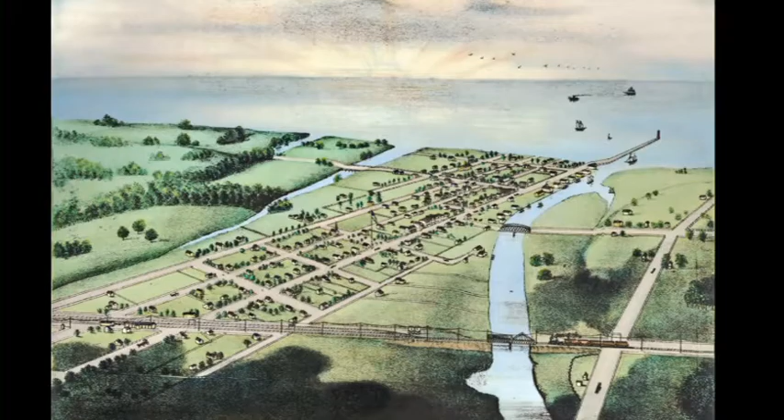After the War of 1812, more and more settlers arrived from the east, eager to carve out new lives in the wild lands of Ohio. The Huron River's easily accessible harbor made Huron a natural Great Lakes port, but first the town had to make some improvements to its harbor. The biggest problems were the sandbar that often formed across the mouth of the river, preventing boats from entering, and the shallowness of the river itself.

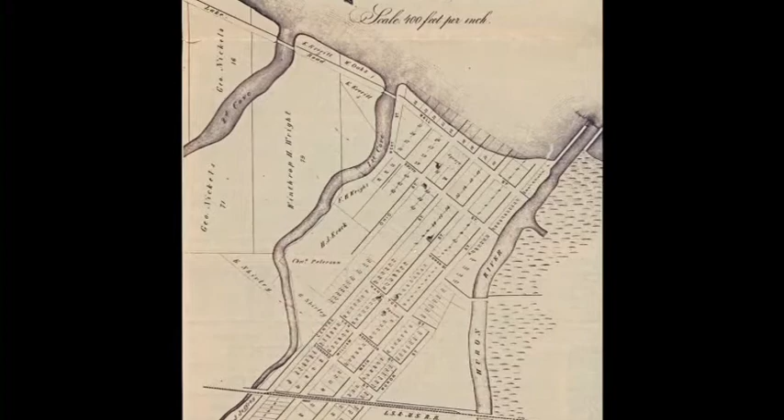In 1823, a group of Huron and Milan merchants formed the Huron Harbor Committee. In 1824, the village was platted, and soon after, a portion of the town was auctioned off to finance improvements to the harbor. In 1827, the federal government stepped in after private funds ran out.

In the mid to late 1800s, railroads were looking for the most ideal locations to build railways and ports. The ore docks in Huron were a typical railroad response in the 1870s and 80s to gain access to the growing iron ore and coal trade on the Great Lakes.

Prior to that time, it had primarily been lumber and other commodities, but now iron ore was starting to assume rather gigantic proportions, so it was a lucrative business because ore used to be mined in Pennsylvania. Now it was coming from Michigan in the 1880s, then later in Minnesota in the 1890s, and it was becoming a very major commodity. So different railroads went to different harbors and built their own facilities.

Almost every town that had a river going into Lake Erie wound up with an ore dock or two. So Huron was the choice of the Wheeling and Lake Erie, which would get iron ore from Minnesota or Michigan, and they would haul it from Huron to southern Ohio, West Virginia, where all the steel mills were.

The railroad closed within 2 years because it could not attract regular traffic or financing for expansion. In 1880, railroad magnate Jay Gould invested in the Wheeling and Lake Erie with the intention of forming a transcontinental railroad system.

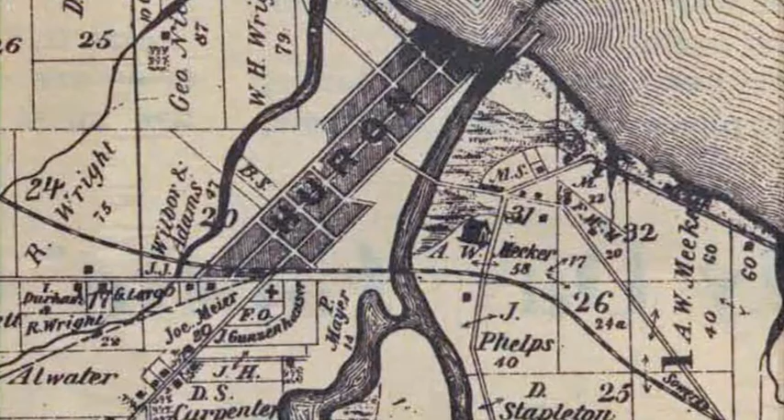Huron then became the Wheeling and Lake Erie's port. Work began on the docks, and what became known as Slip Number 1 was completed in 1882. The dock handled coal, iron ore from mines in Michigan, and lumber that arrived by ship and rail.

The only equipment was the whirlies, small steam-driven cranes that could load or unload a ship. The whirlies ran up and down the east side of the new slip on rails so they could be spotted where needed. A small boiler mounted on a wooden cab worked a hoisting system that raised and lowered a tub. They were called whirlies because after the buckets were filled, they whirled around to be emptied.

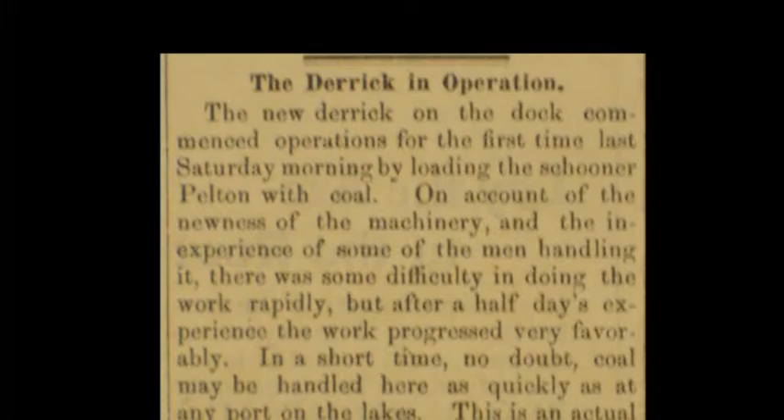The dock workers filled and emptied the buckets by hand. The first ship to be loaded with coal was the sailing schooner Pelton. The first iron ore shipment arrived in Huron in 1883 on the schooner L.C. Butts. It took 16 men to unload 1,120 tons of ore in 3 days, using shovels and the whirlies. Each man was paid $6 for his work.

Around 1888, it became apparent the Huron docks needed to be upgraded if they were to benefit from increased ore and coal traffic. The Wheeling and Lake Erie Railroad finances were poor, so the Huron Dock Company agreed to operate the dock and install new ore and coal unloading equipment.

The first improvement to the docks was the installation of a steam-powered shovel to load coal boats. The shovel was mounted on a pedestal and had a special bucket to scoop the coal out of the railroad car and dump it into the ship's cargo hold. This was an improvement over the whirly buckets, which had to be loaded by hand.

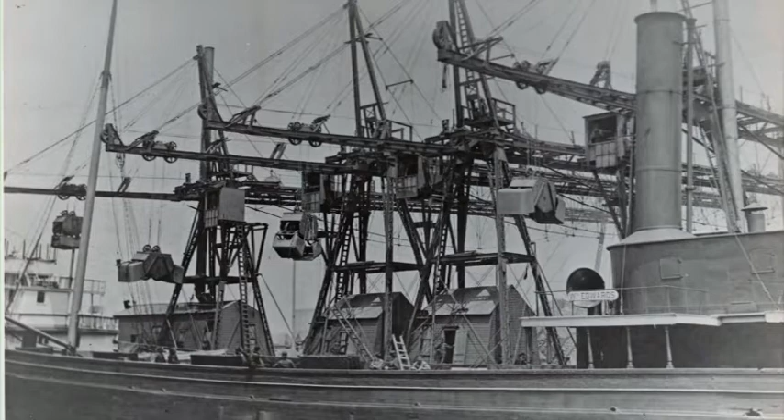The next improvement was the installation in 1894 of 4 McMyler bridge tramways on the north side of the slip for unloading ore boats. The ore bridges had a capacity of 300 tons per hour, compared to 30 tons for a whirly. The McMylers worked by having a bucket carried forward into the apron by cables and dropped into the hold. After it was filled, the buckets were hoisted back onto the bridge and either dumped into cars or onto a storage pile. In the early days, the buckets were filled by hand. The machines were rebuilt to use self-filling buckets in 1906. The bridge tramway revolutionized bulk materials handling, but the whirlies remained in service for many years.

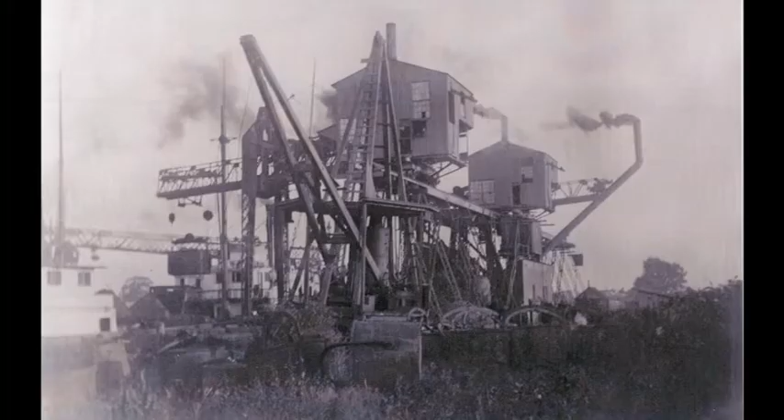In 1896, the coal dock was relocated to the south side of the slip. In addition, the federal government extended the West Pier another 973 feet and built a new East Pier.

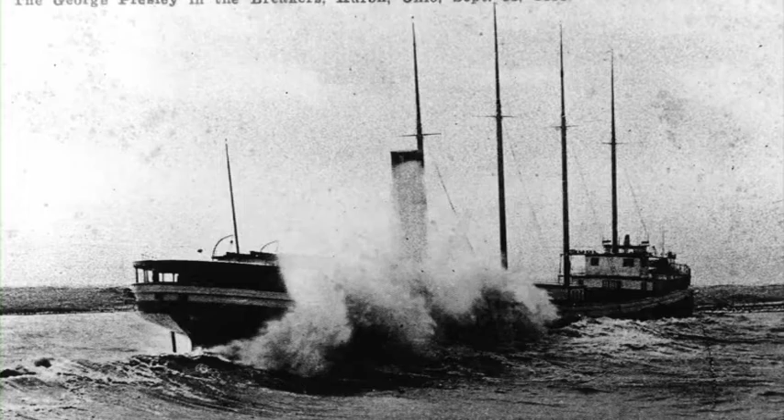In the early 1900s, the lake vessels were getting larger and needed more water and room to turn around when emptied. The ships had to be towed by tugboats out into the lake, and the river wasn't deep enough for the larger boats. They often ran aground, as the George Presley did just off Lakefront Park on the north side of Huron bordering Lake Erie. The bigger ships started shying away from Huron as word of the harbor's problems spread. The docks needed to be updated to stay competitive.

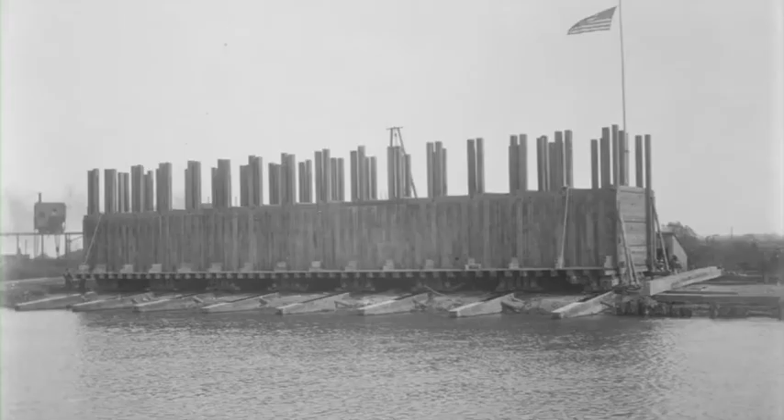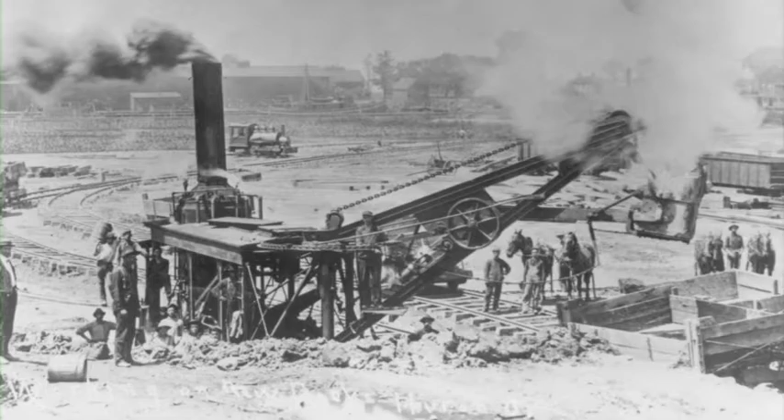In 1906, the Army Corps of Engineers widened the harbor from 120 to 180 feet and extended the west breakwall. And in the same year, the Wheeling and Lake Erie Railroad announced it would spend $1 million on dock improvements, including the construction of a second slip for both ore and coal, the construction of a 1,000 railroad car capacity yard south of the new slip, and the construction of 4 steam-powered ore unloaders called fast plants on slip number 2.

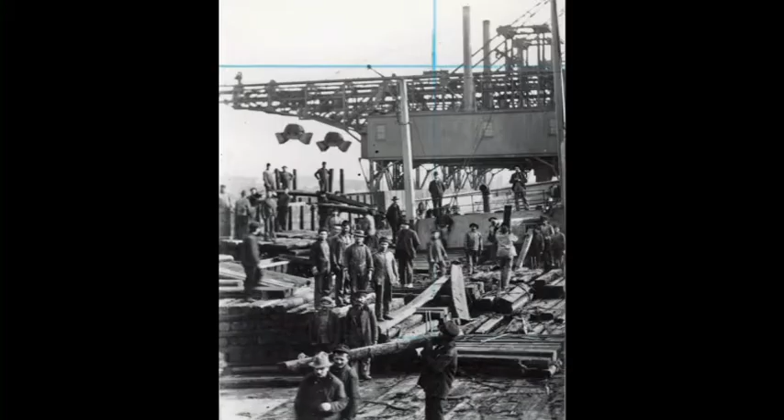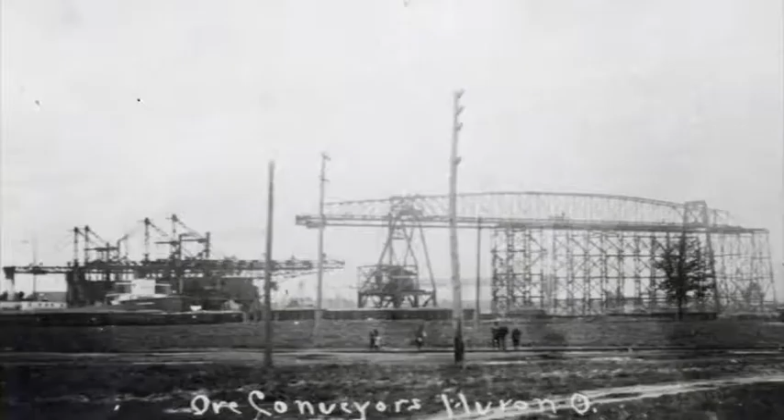They could unload a boat's cargo directly into railroad cars. The installation of a steam-powered traveling ore bridge behind the fast plants to pick up ore for loading into the railroad cars and for transportation to the new storage yard, which was built between the 2 slips. It could store 600,000 tons of ore. There was also construction of a new McMyler car dumper and coal dock complex opposite the fast plants.

The fast plants worked similar to the McMylers. They could unload a boat directly into railroad cars, but not onto the storage piles. They did not extend over the storage yards, but rather dumped ore behind the machines so it could be picked up by a traveling ore bridge.

A new slip and turning basin was built on 200 acres of marshland upriver from slip number 1. This meant that Berlin Road, the main east-west road in Huron, had to be moved. The crossing was located on the south end of the Wheeling yards and was blocking the expansion of the turning basin and shipping channel. A new bridge was built over the river in 1914.

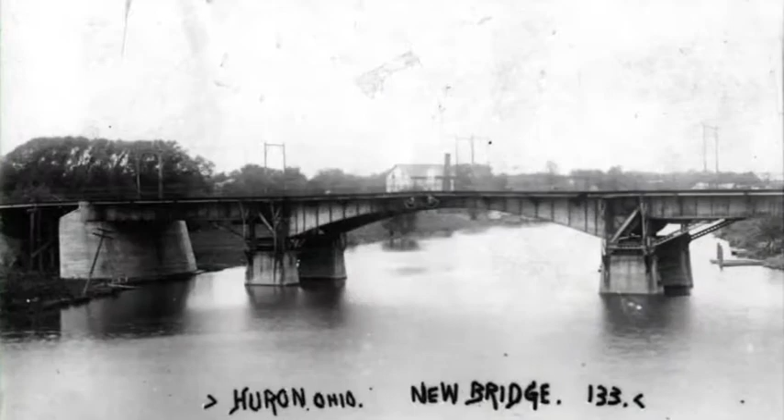The first men to work on the docks were Hungarian immigrants who came to the United States in the 1880s and 1890s to escape political turmoil and high taxes in Hungary. They were soon followed by the Italians in the 1890s and early 1900s, who came to America because of disease, starvation, and economic crisis in Italy.

There was a manpower shortage. Huron was probably less than 2,000 people at that time, and so they had to get somebody to work on these docks. It was hard work. A lot of the people here were farmers, or businessmen with stores. So somehow, and I'm not exactly sure about this, but somehow, either through word of mouth, people from Italy and Hungary that already had friends here heard about it, and they ventured over.

And there were 3 areas from Italy. One of them was Alvito, and that's where most of them were from, and that's where my father was from. There's another town called Creci, close to there, and that's where the Miolas and the Caterys and Jabels came from. And there was Calabria, and the families that came from Calabria were the Laritzes, Joffreys, and Pissanos. And so anyway, these people came here.

They rustled up enough money, got a ride to Naples and came across on a boat, through Ellis Island, got on a train and ended up here. And they had friends that were already here, so they were able to stay at the boarding house there. And they showed up one day on the dock, gave their name, and started working.

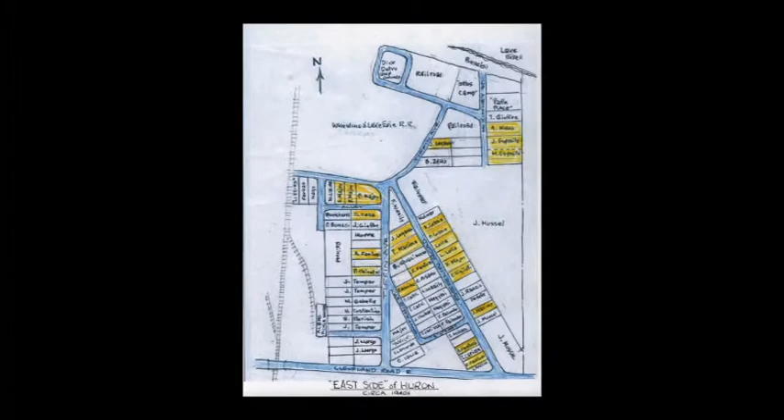It was an area where there were a few houses, and I think the company, the Cleveland Stevedore, anticipated bringing in outside workers, and I think they built some homes there. There's about 4 or 5 of them that still exist that were used as boarding houses. It was available, close to the dock, adjacent to the dock, and there were some houses there that could put up some of the people. It stayed like a close-knit area.

Growing up, there were a lot of kids. One of the things I really enjoyed about that period was there were so many kids my own age. We had the lake on the north, we had the fields in the east that separated us from the dock, so that was all available to us for doing anything we wanted. With so many kids, we always had enough close to the same age to have football teams and baseball, and it was a great place to be growing up.

One of the things was, though, that Italians - even today, everybody has a garden. Back then, because of the Depression, they had not only gardens but they raised chickens and had a couple of cows. It was that rustic - that area at that time, they could do it because of the big fields to the north and west of the area. Old Homestead was practically nothing there at the time.

And so it was kind of like a little colony, and the locals, people had to walk to town. There weren't many cars at that time, so they'd get the groceries they needed to feed their families. The thing about Huron at that time, it boggles my mind: it was less than 2,000 people, yet there were 3 grocery stores, 3 auto dealers, several restaurants, at least 3, 2 hardware stores, two drugstores. It went on. Now you look there and there's a boat basin. Everything they needed was within walking distance, and they became friends with the local dealers, like the Thomas Market, and began to fit in. But still, there was that little prejudice with some of the people.

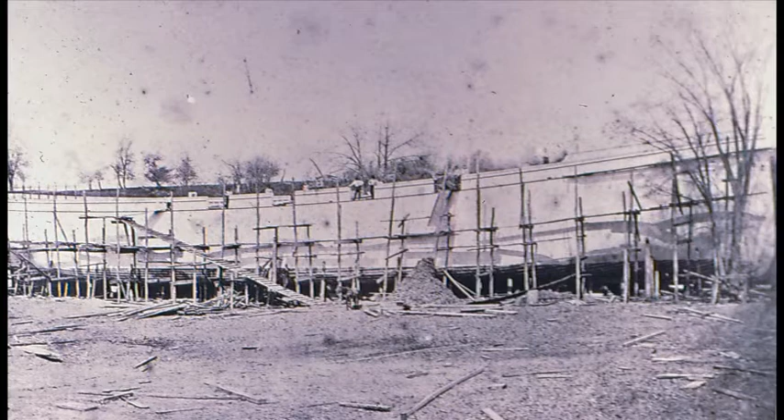One of the largest schooners to sail the Great Lakes was built just a few miles up the Huron River at Fries Landing by Valentine Fries. At 287 feet long, with a carrying capacity of 3,100 gross tons, the Golden Age was a huge oak-hulled, four-masted schooner completed in 1883.

She sailed the Great Lakes for 41 years, the last of which as the barge Pringle out of Detroit. She was sunk as part of a breakwater near Put-in Bay, Ohio, in 1924.

Another schooner built by Valentine Fries was the Charles C. Foster. She was one of about 40 vessels chartered in 1898 by the Atlantic Transportation Company of New York to engage in the coal trade on the Atlantic coast between Norfolk, Virginia, and New England ports. The boats were no longer needed when the coal market collapsed after the end of the Spanish-American War in 1899.

Some of the fleet returned to the Great Lakes, including the Charles C. Foster. Her life as a Great Lakes cargo boat lasted just 6 months, from June to December of 1900. She was being towed by the steamer Iron Duke with a cargo of iron ore when she sank in a storm off Presque Isle near Erie, Pennsylvania. Eight lives were lost when she sank. A month later, the Foster was found 80 to 100 feet under Lake Erie.

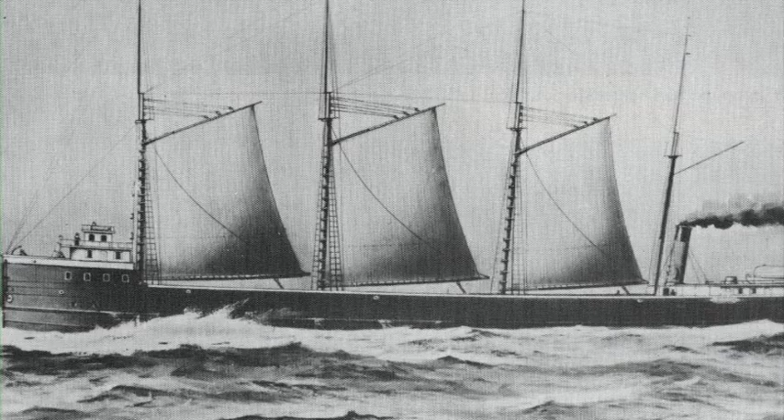In 1884, the Chauncey Hurlbut, a wooden steam barge built in 1873, brought the second load of ore cargo to the Huron docks. Dock workers unloaded 1,195 tons of iron ore and then reloaded her with coal.

The 185-foot-long steam-powered bulk freighter was constructed of wood. The pilot house was located forward, with the engine room aft and the cargo hold in between. The Chauncey Hurlbut sailed the waters of the Great Lakes for 30 years before she was lost in a storm off Vermilion in 1908. Iron was good.

They built a few of those boats, but then they found out iron was brittle.

So they went to steel, and that became the standard. It was still the steam barge concept, but they started calling them boats again. And they grew in size. By 1900, they were 400 feet. By 1905, maybe 500 feet. By 1910, 600 feet. But they were all the same standard design with a pilot house forward, a large open cargo hold, and the propulsion equipment in the stern. And things didn't change for a long time. It wasn't until the 1970s that the self-unloaders came in.

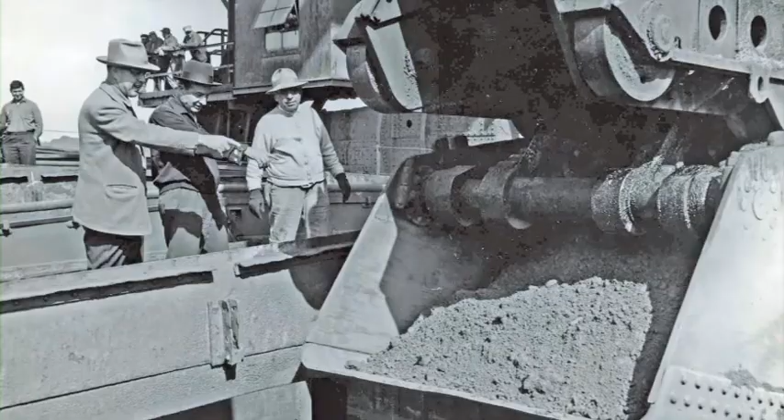The Huletts consisted of a large walking beam mounted on a carriage that moved laterally across the docks. It was mounted on a huge traveling base that moved up and down the docks on rail and could be positioned over any hatch on a boat. A self-loading clamshell bucket was attached to the base of a vertical leg fastened to the outboard end of the walking beam. The operator rode in the leg and controlled the movement of the machine.

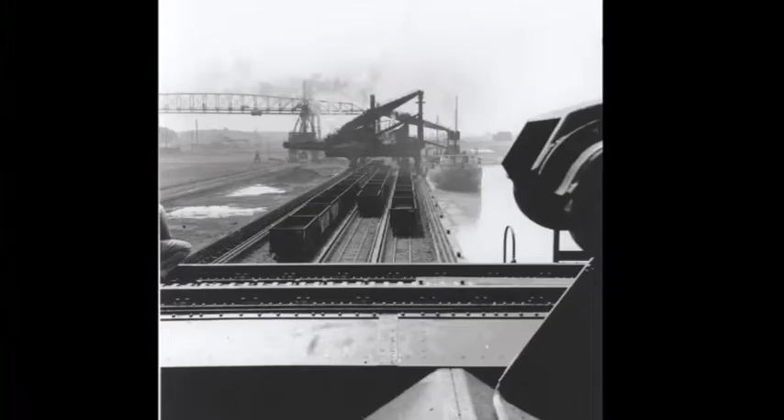When the bucket was full, the operator would close the bucket and dump the ore into a hopper over a Larry car mounted on a traveling base. The Larry car weighed the ore, then dumped it.

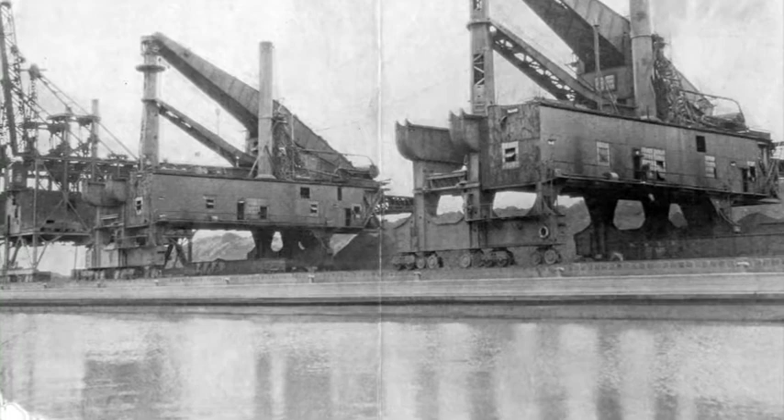Most Huletts operating on the Great Lakes were electric-powered. Because Huron's light plant could not generate enough electricity to power electric Huletts, and the Wheeling and Lake Erie did not want to build their own power station, the railroad installed steam-powered Huletts, which were called water dogs. They were the last steam-powered rigs to be installed on the Great Lakes.

The Hulett was revolutionary in that it was able to load its own bucket, which up till that time had not really been a practical alternative. Iron ore is so dense and heavy that you just can't use an ordinary clamshell bucket. The bucket would literally bounce off the ore pile. So the Hulett had enough mass and weight that it was able to penetrate the ore pile, and it had a scraping motion which would gather the ore into the bucket, so it was self-filling. And if you read some of the initial reports about it, it was always referred to as a self-loading machine.

They would be able to fill the bucket, load it into a rail car, go back, and the cycle time was such that they could do 300 tons an hour. This compared to men shoveling that could do 2 tons an hour per man. So it was a tremendous step forward, but it also substantially reduced the amount of manpower required to unload a vessel. Because for a while there, the ore trade was growing so fast that they were running out of places to build docks because it was so slow to unload a boat. It'd take 3, 4, 5 days to unload some of the bigger boats by hand. Well, the Hulett was able to do it in a matter of hours.

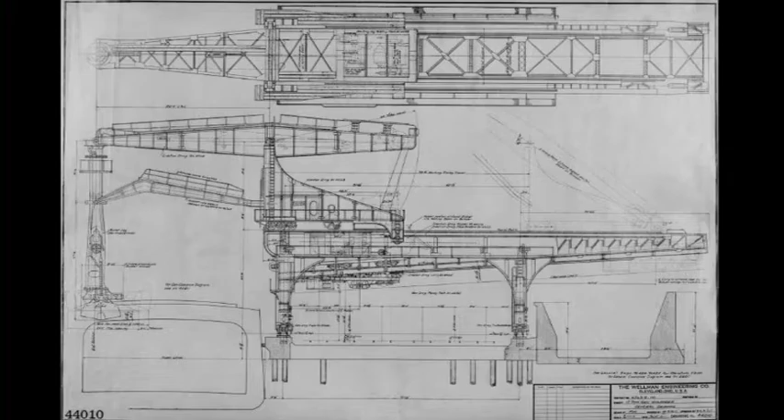So Huletts became popular at a lot of the railroad docks. The Hulett was designed by George Hulett, who was from Conneaut, Ohio, my hometown, who designed the initial machines in the late 1890s. The first one was built in Conneaut, Ohio, on the ore docks that were operated by Andrew Carnegie. Legend has it that Hulett was told he could put the machine up or assemble it at his own expense, and if it didn't work, he had to scrap it at his own expense. So it was a gamble. The machine itself was actually manufactured by a company called Webster, Camp and Lane that was out of Akron, Ohio.

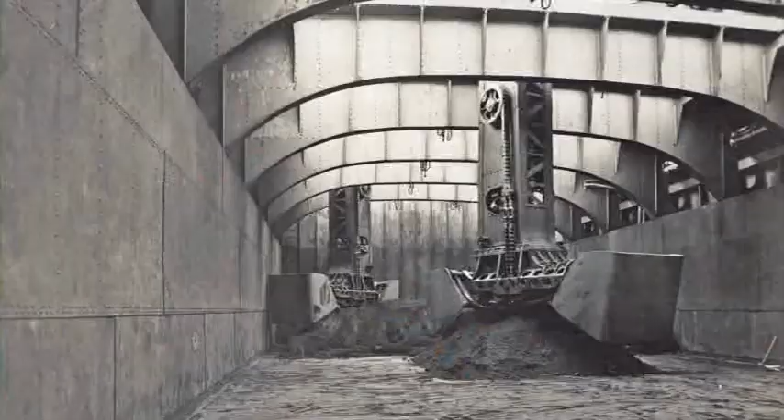They built the machine in Conneaut, and it was an instant success. You went from having maybe 120 guys working on a vessel and unloading it in 2-3 days, to unloading it in 4 hours with maybe 20 people, because you eliminated a lot of the manpower loading the buckets by hand. You still needed people in the cargo hold to clean up and bring ore in from the corners and things like that, but the Hulett was revolutionary.

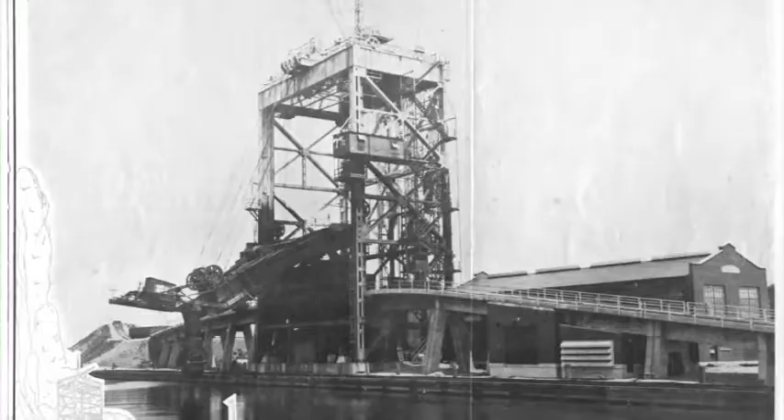In 1937, the docks were improved by installing a new electric car dumper on the north side of slip number 1. It was the most modern coal dumper on the Great Lakes at the time, with a capacity of 50 to 70-ton cars per hour. Loading the cargo holds with coal was a precise operation.

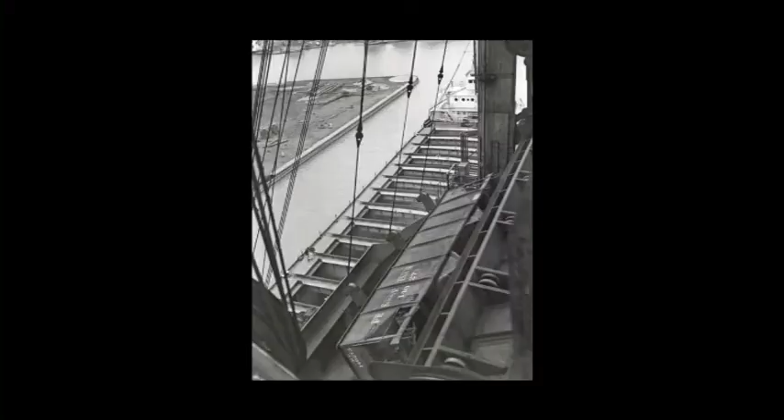The cars were first moved from the loading yard to the coal dumper. Each car was moved by gravity and had a brakeman who worked the handbrake wheel to control its speed. A pig ran between the tracks and pushed the car up the hill into the hoist mechanism. The coal would fall into a funnel which directed it into a chute leading into the vessel's hold. The chute on the dumper could be moved to place coal into any part of the cargo hold.

This enabled the men to trim the boat and fill the hold to the maximum. Because coal is relatively light for the volume it occupies, a boat hold could be completely filled.

When a car was emptied, it was put back on the track and rolled away from the dumper, up the kickback. Gravity and the skill of the brakeman who rode the hopper reversed the empty car's direction on the kickback, and it rolled through a switch into the yard for empty hoppers. This was dangerous work. The brakeman had to slow the car by hand to prevent it from crashing into a string of empty hoppers.

A new addition to the docks came in 1941 when the Eastern States Farmers Exchange began erecting a grain elevator where the first coal unloader was located. Construction was stopped during the war and was completed in 1952. The mill, which produced livestock feeds, employed 300 workers by 1956.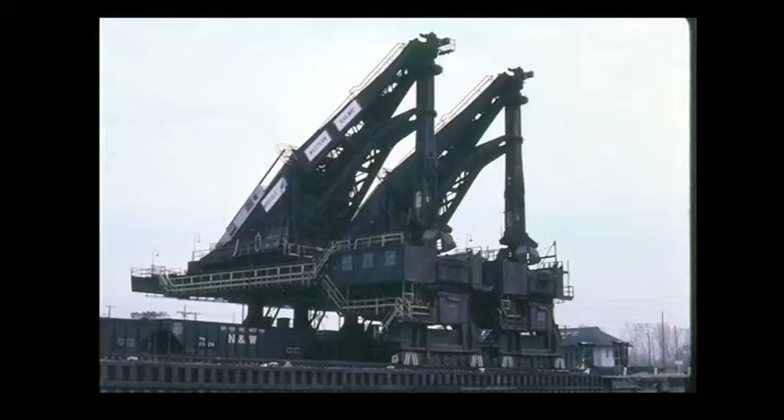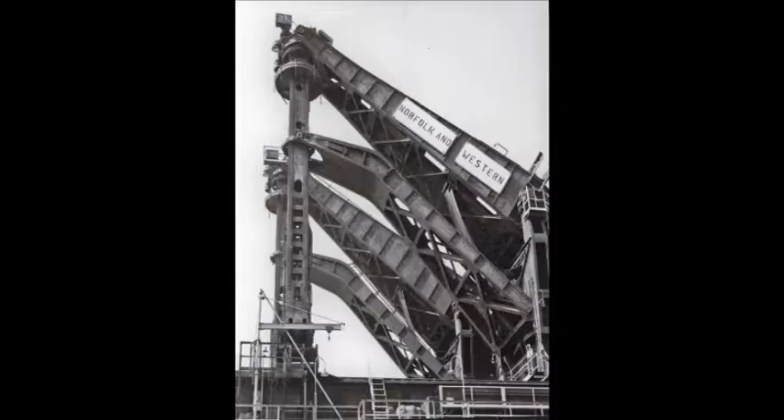The reason I started there is because they needed an electrician, because they brought some new Huletts in there that were run by electricity. Those two big rigs were all electric, and it was my responsibility to make sure they were running properly at all times. If we had any problems with them while unloading, it was my job to get up on that rig, locate the problem, and get it going immediately. They did not want any lost time. There was a lot of pressure with that job whenever the boat was there, because we didn't want to lose any time because of any malfunction on the rigs.

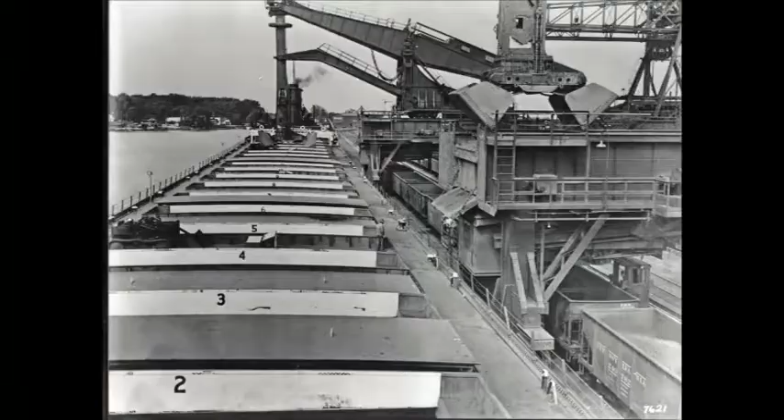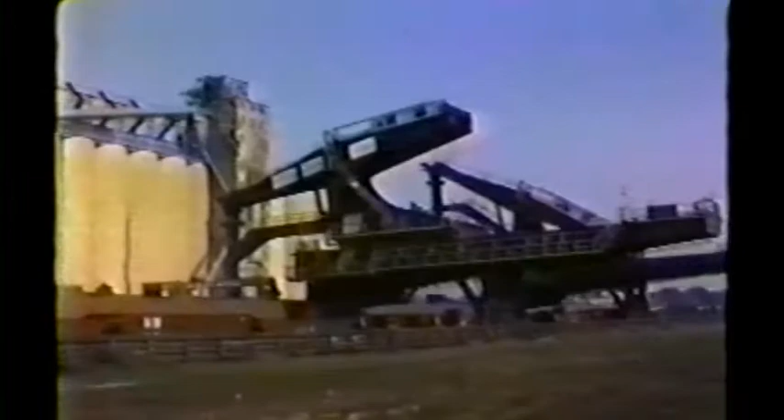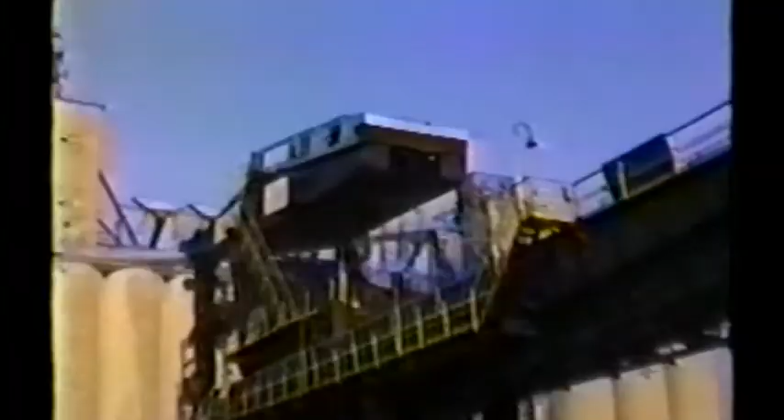We picked up the electric from hot rails running alongside the tramway that the rigs ran on, and of course that was high voltage, 480 three-phase. There were shoes that slid along those rails that picked up the electric, and sometimes those could get bad or dirty and lose some of the current. But up in the rigs, we had big synchronous motors running from 480 three-phase voltage, and those synchronous motors were running DC generators.

The rigs were run all by DC current. Even though we picked it up on AC, we ran them all on DC, and the reason is the ease of control. With DC motors, you could just barely budge the rig, or make it run faster, whatever. There were relays and limit switches all over the place. When these rigs would go back and forth, if the operator wasn't watching closely, we had limit switches that would slow them down or stop them. They were kind of backups for the operator. Those things could go bad.

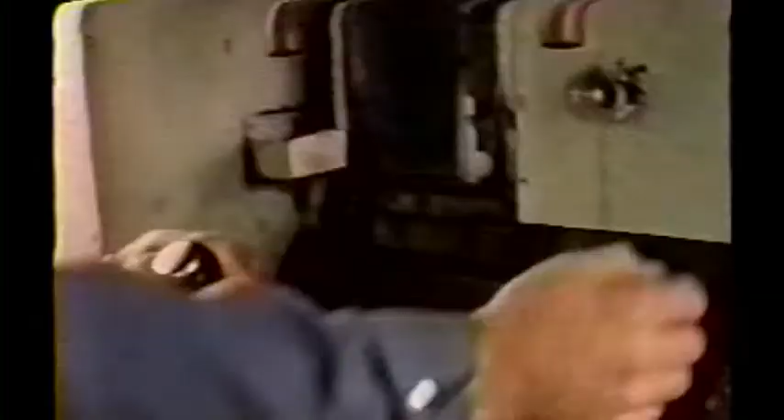A lot of the relays and instruments on the boards, you never knew, because of the dust from the pellet ore and everything. But after as many years as I was there, when a rig stopped, you could almost go up and put your finger right on the problem. If they'd cough, you'd know almost what they were coughing about.

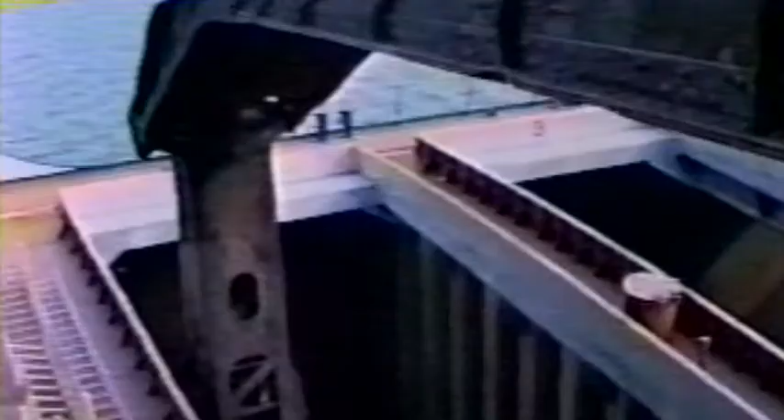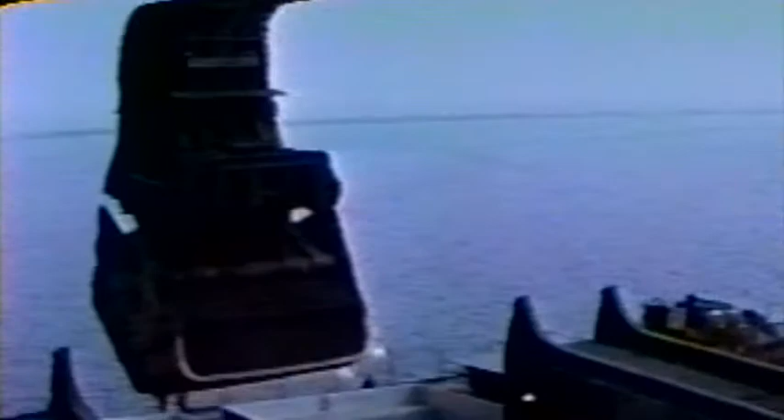One safety issue was that when an electrician is working on something with that high a voltage, we didn't necessarily always have to work it hot, but if we did, you always had to have another electrician. So the ore dock always had two electricians. I always had an electrician with me whenever we were working, and that was one of the safety features, if not a big help as well.

And of course, we had to wear certain kind of shoes. We wore shoes that had no nails in them. They were kind of an insulating shoe. We bought them special so that when we were working on steel and trying to touch something electric, we made sure that we didn't get shocked or get killed by electrocution.

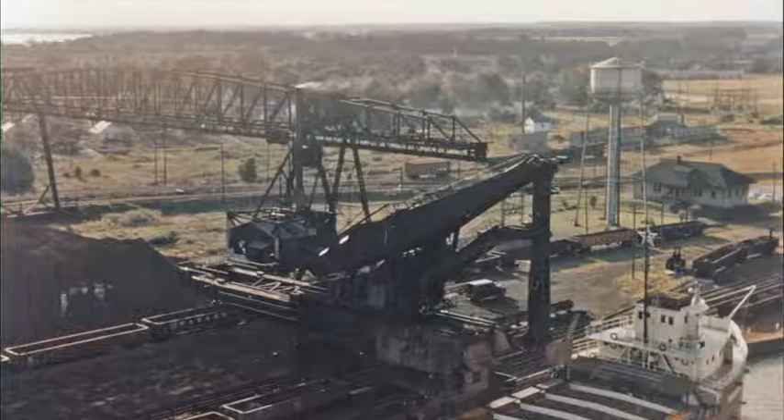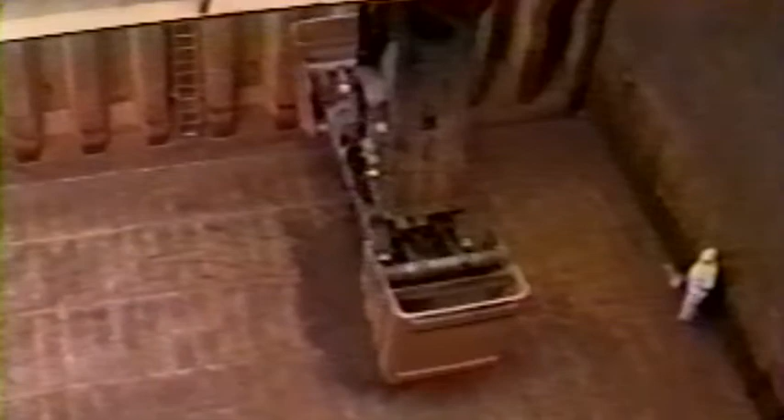When we would get a boat in, I would go up on the rigs and get everything working, get everything turned on and get it ready. Then I would okay to the operator, the rig is ready to move. Then they would go ahead and get to operating.

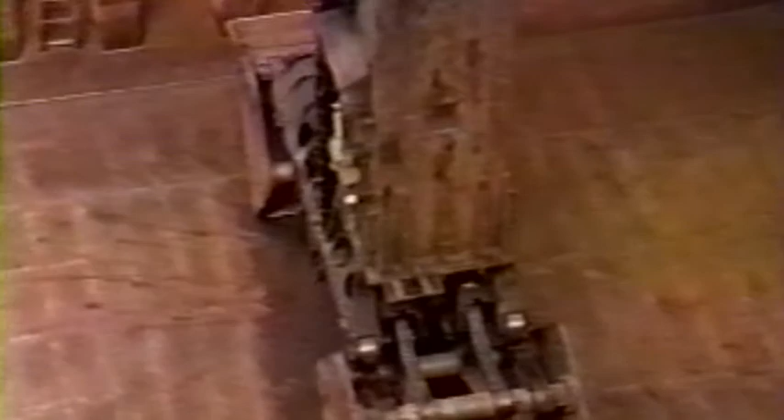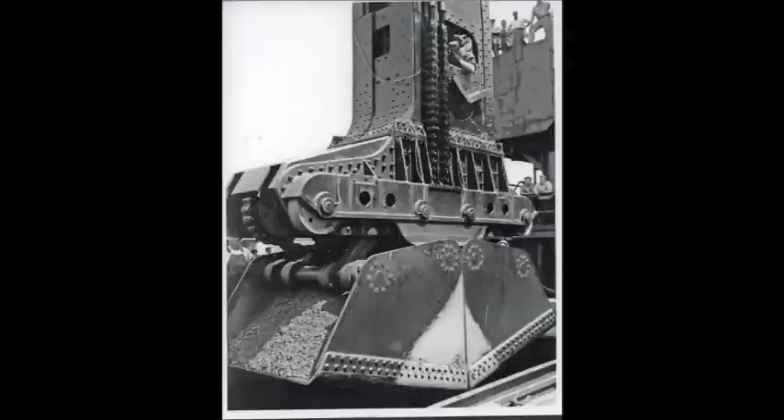But if, while they were working, something wasn't working just right, we would want them to notify us immediately. The way they would notify us, they would blow a horn, 2 longs and 2 shorts, and then we would get up on the rigs and ask the operator, well, how's it acting? And as soon as they'd tell us, then we would go look for that trouble and keep the equipment going.

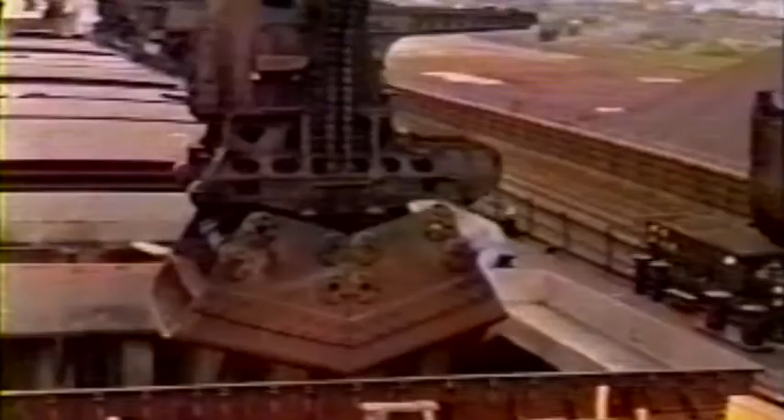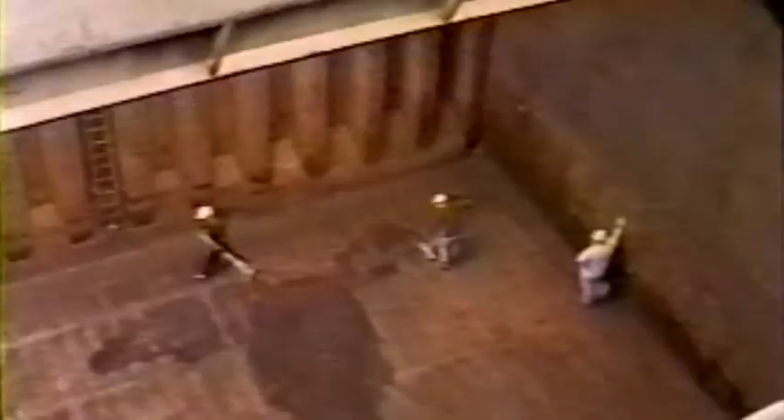I saw one man get killed. He was standing there actually looking towards the north, and they were pushing cars in from the south, and he was an elderly man. He did not hear the trains coming, and the cars pushed right into him and killed him. That was an unfortunate situation, and that even happened back in 1950, shortly after the rigs were running, and I was comparatively new at the time, and that bothered me quite a little bit because I wasn't used to accidents happening like that.

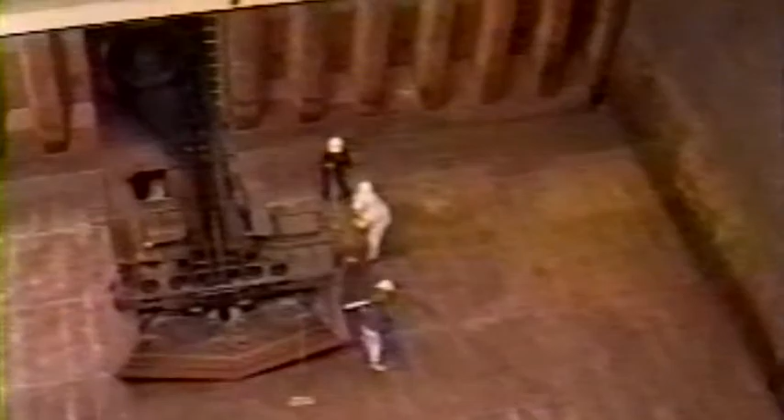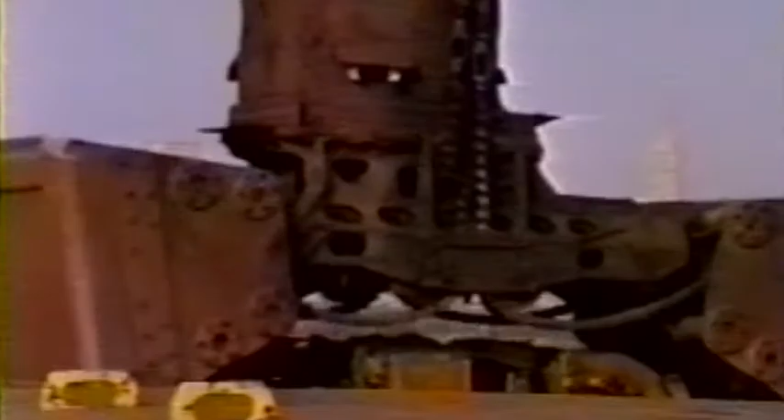And then over at the coal dock, we had a man over there. He'd been working all day on our boat, and we had just one shift, and we went over to the coal dock then and loaded a boat over there after unloading the ore boat the day before without any break. And while we were loading the coal boat, we had a man slip underneath the car and lost his leg, which was very unfortunate.

To me, it was a good job, and by that I mean we worked long hours. We got a lot of overtime in. There was no such thing as a set time, because we could be called out any hour of the day or night. Whenever the boat came in, we would be there to unload it and be there, of course, until it was unloaded.

The men accepted me. There was a set group of men that had been working there for years, and I was kind of an outsider when I went to work there. But when I went to work there, they accepted me right away, and I became a good friend of theirs, and they're still good friends of mine.

The Wheeling and Lake Erie Railway purchased 2 30-ton electric pushers called mules, used to spot cars under the Huletts. They replaced steam locomotives that had been previously used for this job. Pushers picked up the empty cars at the north side of the dock, spotted them for loading, and pushed the full cars to the south end of the dock, where a yard engine picked them up and hauled them to the South Huron yard, where the loaded cars were shipped to the steel mills in southeastern Ohio and West Virginia.

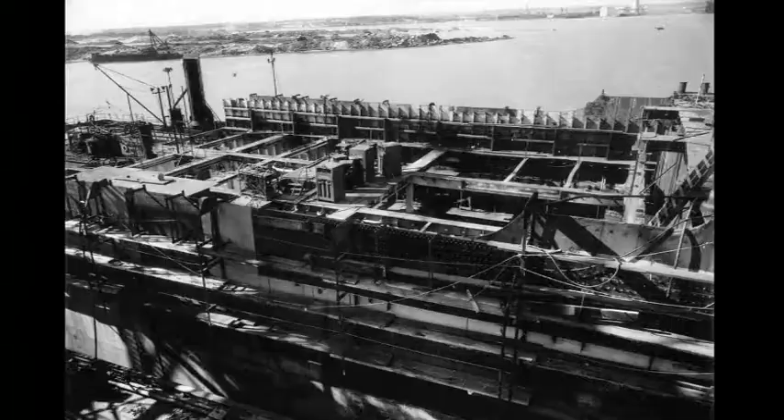After the war, the Marine Robin and her other cargo sisters were put into mothball fleets all along the East Coast. Like the Victory ships, some of the C-4 cargo boats were purchased by U.S. and Canadian iron ore companies during the Korean War. After her conversion in 1952, the Marine Robin was rechristened the Joseph H. Thompson. She was the largest freighter on the Great Lakes at 714 feet, 3 inches long. She plied the Great Lakes until 1981, when the bottom dropped out of the iron ore market. After a few years of sitting idle, a Michigan towing company bought the Thompson and turned her into a self-unloading barge, a job she continues today.

The Arthur M. Anderson was another familiar visitor to the Huron docks. She was constructed in Lorain, Ohio, by the American Shipbuilding Company and launched on February 16, 1952. The Arthur M. Anderson is most famous as the last ship to be in contact with the Edmund Fitzgerald before she sank on November 10, 1975, in Lake Superior. The Anderson was the first rescue ship to reach the Fitzgerald after it sank, in a futile attempt to rescue any survivors. The Edmund Fitzgerald also delivered iron ore to Huron.

From the 1950s to the early 1980s, the docks continued to be a strong economic force in Huron. The jobs on the docks were often passed down from father to son, and despite the erratic hours, the pay was good. The men were on call 24 hours, 7 days a week. It could take 11 to 12 hours to unload a boat.

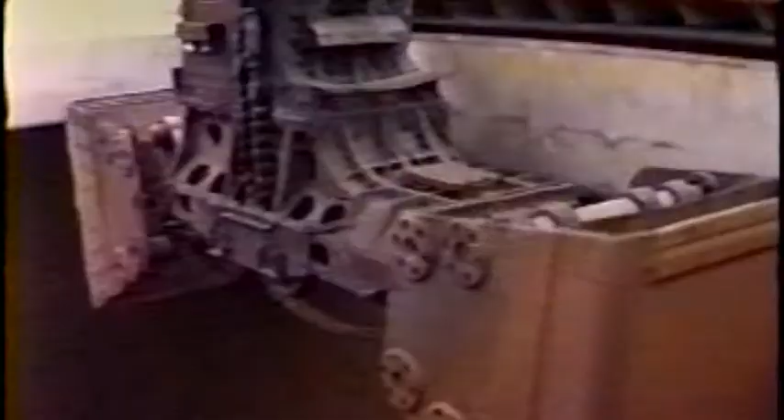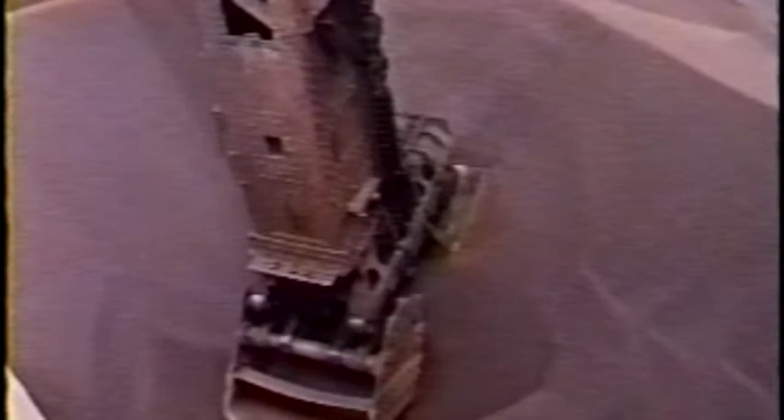Had a huge hoist motor on the back end with 4 wires on it, all 1.5 inches. These would bring the machine up and down. The operator in there had a control which would trolley him out, and the next control could take him down. Then he had a lever to open and close the bucket. These were all run by cables, other than the trolley in and out. Cables went right up through the leg to go down there, and this bucket would be 22 foot open. Drop it right into the pile, whether it was ore or pellets, close it up, come on up, and that dumped into a big round hopper.

55 seconds, that's all, and then they would come out. These guys were good at it. Joe Mina would run that thing, and he'd have it that close to the hatch coaming, and nobody ever hit it. My cousin Ralph Pisano Jr. did one time, but he was messing around.

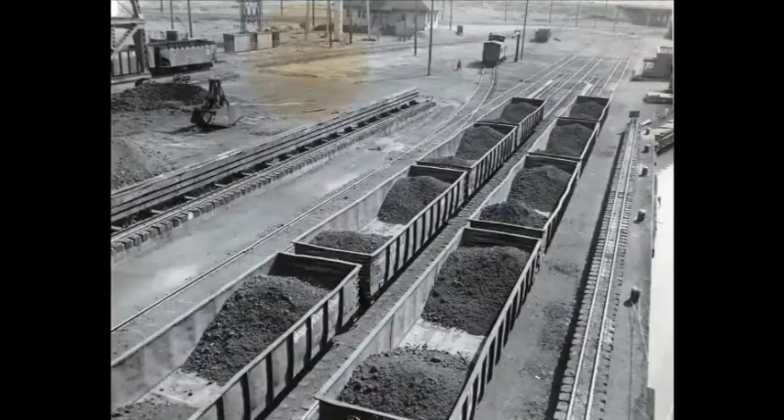They would bring this up, there was a hopper up above, and they would dump into this hopper. It would probably hold about 50 or 60 ton. The Larry man had a list of the cars with the numbers and the gross weight they could haul. In these cars, he would make out a ticket. Normally in a railroad car, he'd make 3 dumps in it. If it was a maximum load of more than 200 tons, he'd put about 60 in one end, or 80 in one end. Then the guy running the pusher down below would move the car. You'd put about 80 in the other end, and then put it in the middle. They had a pusher man that would spot this car and he would dump it. You had a scale in there to weigh it. But it would take approximately 3 dumps in almost all cars.

The cars, well, they sent them to various places. They went to McDonald's up at Youngstown. A lot of it went to Steubenville, Wheeling, Pittsburgh Steel down there. That's where the biggest share of it went. Once in a while you'd get something going down to Ashland, Kentucky, to Armco.

They would have, you had 4 operators, you had 2 electricians, you had 2 oilers, you had 4 Larry men, you had 4 pusher men, and 4 laborers. So it totaled up about 20 most of the time, and car checkers.

Joe Solardi, George Chapman, I'd be welding on a bucket. You try to weld it so it don't leak, because if I didn't keep the bucket closed up, Tony Tate would get on me, he had to clean the deck, see. So I'd be welding on it, and them guys would sit there and peck these pellets at you. So one day I went in and asked Bob Engel, I says, doesn't the locker room need cleaning out? He says, yeah, probably, boss. I said, close your door. Well, I took a 1.5 inch fire hose, and Ralph Pisano Jr. opened the valve, and I washed Joe Solardi right out the door.

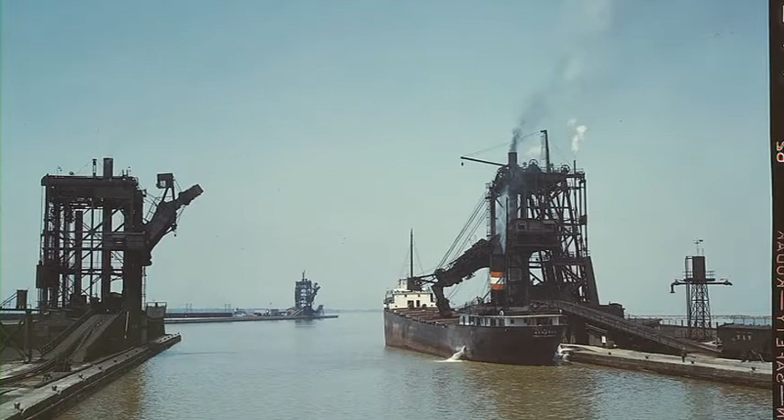Unfortunately, in 1958, coal shipments began a gradual decline. On October 16, 1964, the Nickel Plate Railroad merged with the Norfolk and Western Railroad and the Wabash Railroad. As part of the merger agreement, the N&W bought the Pennsylvania Railroad's line from Columbus to Sandusky, which included Sandusky's coal docks. Because coal shipments had been declining in Huron, they shut down the docks and sent all coal shipments to Sandusky. The J.E. Upson brought the final shipment of coal to Huron in November 1964.

The car dumper crew was laid off. Those with enough seniority went to work on the ore dock, which meant layoffs for those with less time on the docks. Although the coal docks ceased operation, in 1966 the north end of the docks found new life with the construction of the Huron lime plant. Still in operation today, the lime plant receives shiploads of limestone that it converts into hydrated lime for steel making.

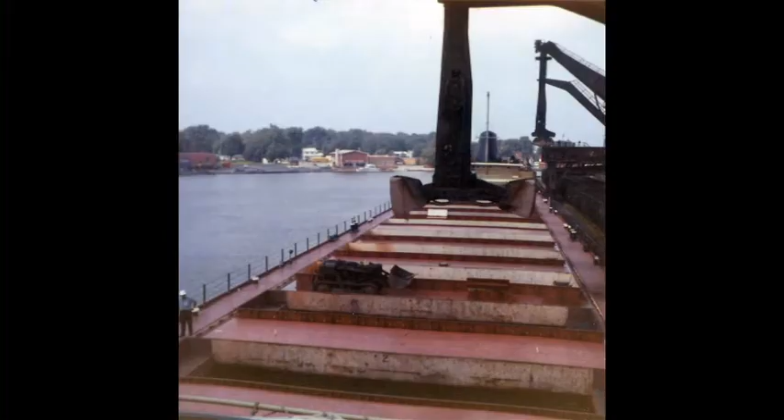By 1971, the Eastern States Farmers Exchange was owned by the Pillsbury Corporation, which used the 20-acre site as a Great Lakes and international grain shipping terminal. Business at the ore docks was strong through the 1970s. An all-time record was set in 1979 when 151 boats brought in 2,784,000 tons of ore.

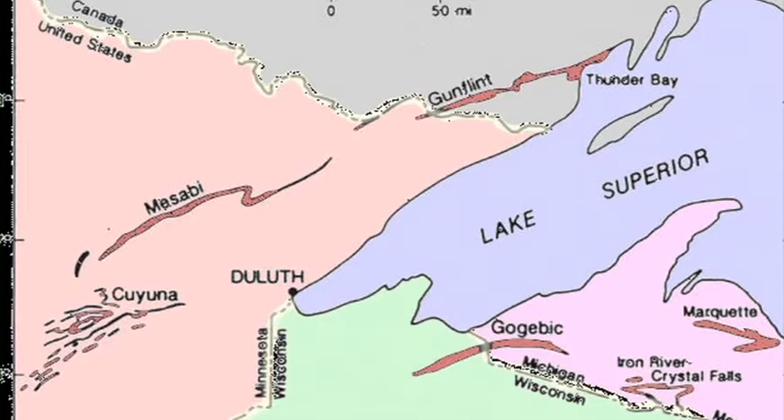As higher-grade iron ore grew scarce, it was replaced by lower-grade taconite. Although most of the high-grade iron ore had been depleted from the mines in Minnesota, Michigan, and Canada, scientists in the 1940s developed an inexpensive method of extracting pure iron from taconite. Taconite is a flint-like type of rock containing low-grade iron ore.

Vast reserves of taconite were discovered in Minnesota in 1870, but were considered worthless because extracting the pure iron from the mostly impure ore was extremely difficult and too costly. The Reserve Mining Company built a taconite processing plant at Silver Bay, Minnesota, where by the late 1950s they were producing 6 to 10 million tons of pellets a year.

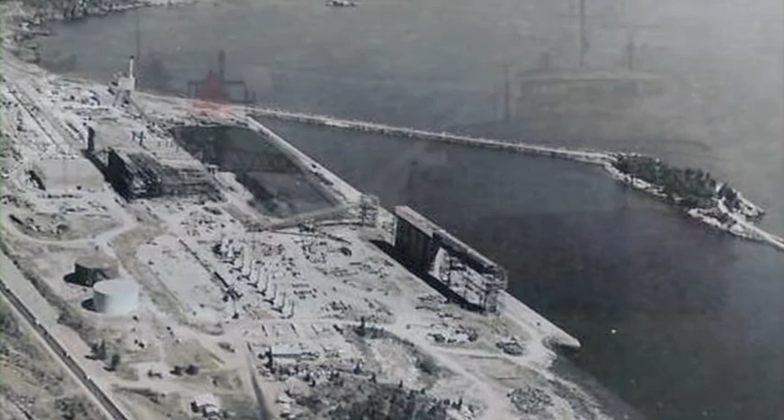By 1982, the ore dock began receiving most of its taconite in self-unloading freighters. In that same year, 31 of 66 boats were self-unloaders. The Huletts were becoming obsolete. In 1983, they were used 3 times, in 1984, 7 times, and in 1985, back down to 3 times.

Even though the Huletts were rarely used, the docks were still busy. In 1984, the docks received its largest single cargo ever, 38,108 tons of taconite in the freighter St. Clair.

It wasn't until the 1970s that the self-unloaders came in, where they put a conveyor belt under the cargo hold and a boom, and it unloaded itself. And that was kind of the end of the docks that used Huletts and other shoreside equipment.

The docks then just switched over to providing an open storage space and then loading it out of the pile into rail cars.

You went from maybe 100 men on a Hulett dock, say at Huron, to 1 or 2 people monitoring the unload, primarily telling the boat where to spot the cargo, and then maybe 4 people loading the rail train. So the manpower requirements were substantially less.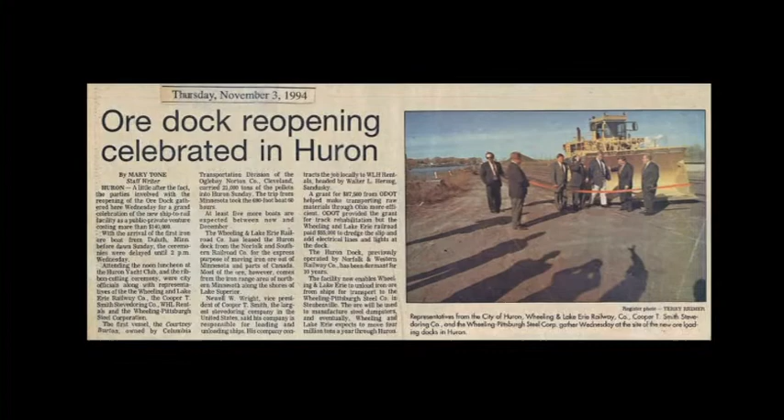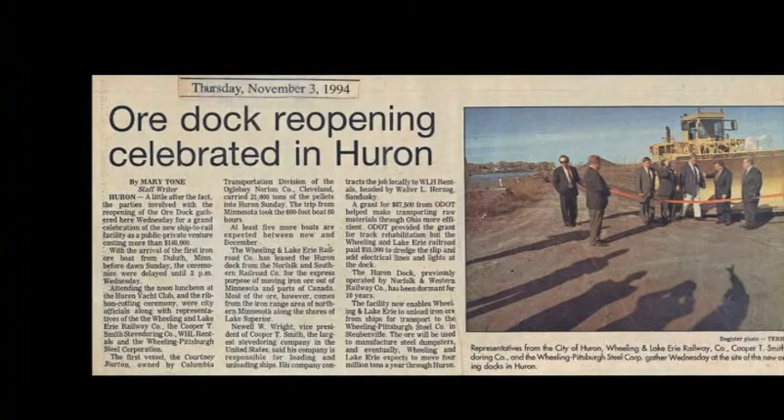That's really amazing. After a nearly 10-year hiatus, the dock resumed service in 1994 when the Norfolk Southern Railroad leased the dock to the Wheeling and Lake Erie Railway, a newly formed privately owned company.

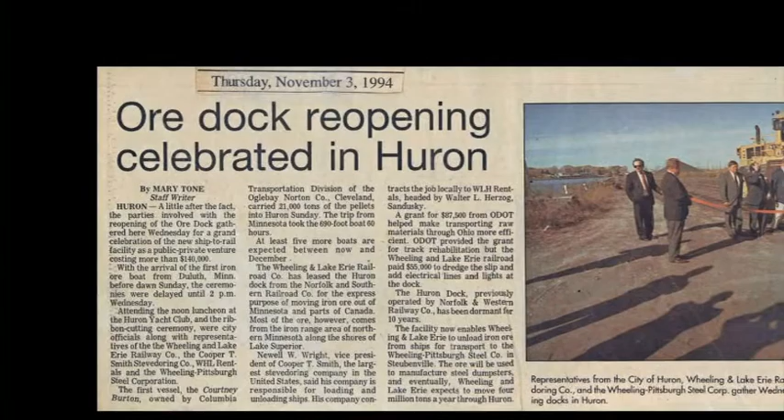The Cooper T. Smith Stevedoring Company, one of the oldest and largest in the United States, was responsible for loading and unloading the ships. Shipments of taconite from mines in Minnesota are delivered to the Huron dock by Cleveland Cliffs boats. A few men can unload the ore onto railroad cars in about 4 to 6 hours. The taconite is shipped by rail to steel mills in Steubenville, Ohio, and Wheeling, West Virginia.

The ore and coal docks played an integral part in Huron's history. As the docks grew, the town's economy prospered. New jobs brought new families to the area, creating an increased demand for goods and services. For many, many years, the docks served as one of the driving forces behind Huron's continued growth and thriving economy.

But when the coal docks ceased operation and the Huletts were replaced with self-unloading ore ships, one of the most significant chapters in Huron's history came to an end as well. The docks have left a lasting legacy embodied in the descendants of the people who labored there and in the culture of the town itself.

Today, the docks are in a state of transition. The Harvest States Mill ConAgra Foods facility closed in 2006 and was sold to the Ohio Department of Natural Resources. ODNR's Division of Watercraft built a public boating and fishing access site with launch ramps, docks, and parking facilities in 2009. The City of Huron received grant money to raze the former grain silos and flour mill.